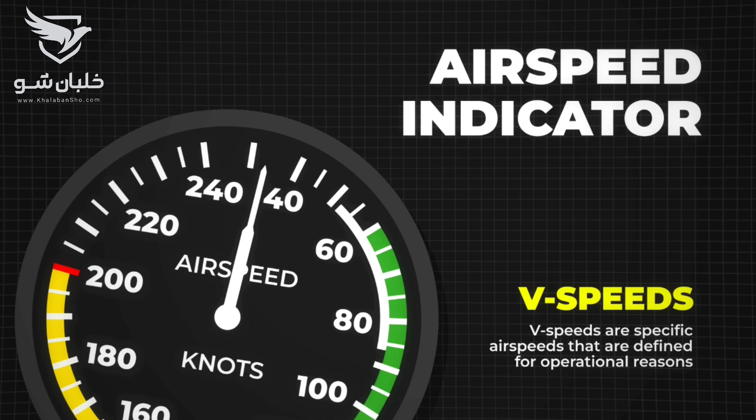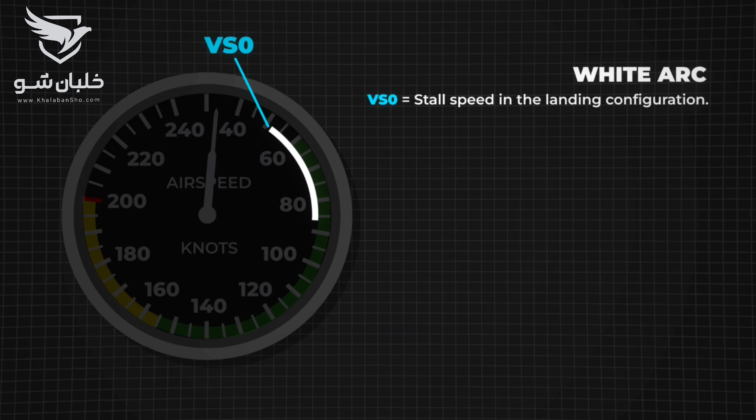The airspeed indicator has different colored arcs. The white arc represents the flap operating range. At the bottom of this arc is VS0, the stall speed with flaps fully extended. If you go below this, the aircraft will stall because it's not generating enough lift. At the top of the white arc is VFE, the maximum flap extension speed. Going faster with flaps out could damage them.

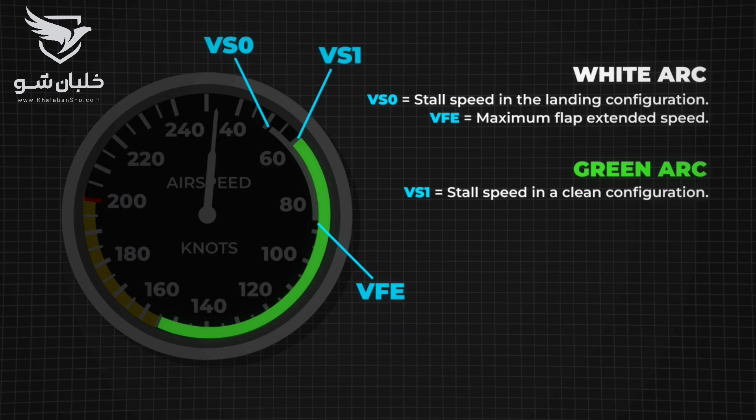The green arc is the normal operating range. At the bottom of this arc is VS1, the stall speed in clean configuration, meaning with flaps retracted. If you fly slower than this, the aircraft will stall. At the top of the green arc is VNO, the maximum normal operating speed.

Beyond this, you enter the yellow arc, the caution range. You should only fly in this range in smooth air. The red line at the top marks VNE, the never exceed speed. Going faster than this could cause structural failure.

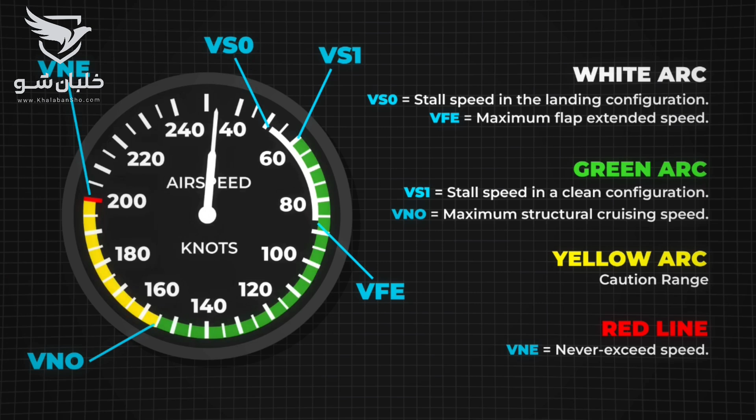Now let's move on to takeoff speeds. V1 is the takeoff decision speed. Before this speed, the pilot can abort the takeoff. After passing V1, the aircraft must take off, even if there's an issue.

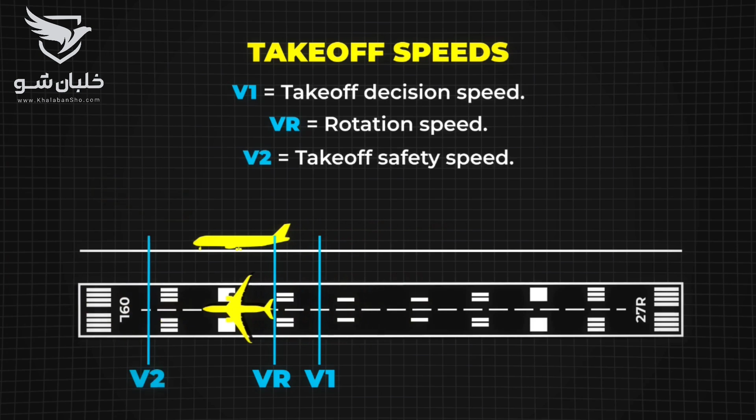VR is the rotation speed, the point where the pilot lifts the nose for takeoff. Below this, there's not enough lift to fly. V2 is the takeoff safety speed, ensuring a safe climb if one engine fails in a multi-engine aircraft.

After takeoff, climb speeds become important. They determine how efficiently an aircraft gains altitude after takeoff. VX is the best angle of climb. This means it allows the aircraft to gain the most altitude over the shortest horizontal distance. If there's a tree, a building, or terrain right after takeoff, you need to climb as steeply as possible to clear it. That's when you use VX.

Since the nose is higher, the aircraft climbs more slowly, and airflow over the engine is reduced, which can cause overheating in some aircraft. VY is the best rate of climb. It allows the aircraft to gain the most altitude over the shortest amount of time. If there are no obstacles, VY is the best choice because it gets you to a safe altitude faster. The climb angle is shallower than VX, but the aircraft is climbing at a greater vertical speed.

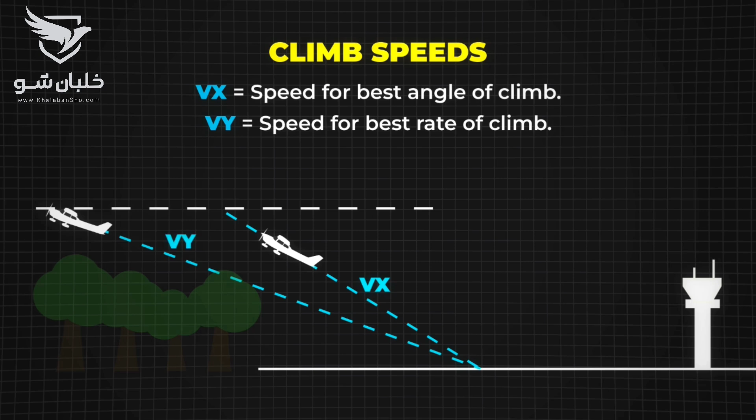Here are some additional V-speeds that are important for flight operations. Let's go through them one by one. VA is the maximum speed at which full and abrupt control deflection can be applied without exceeding the aircraft's structural limits. It is also recommended for turbulent conditions to prevent excessive stress on the airframe. This speed decreases as the aircraft's weight decreases.

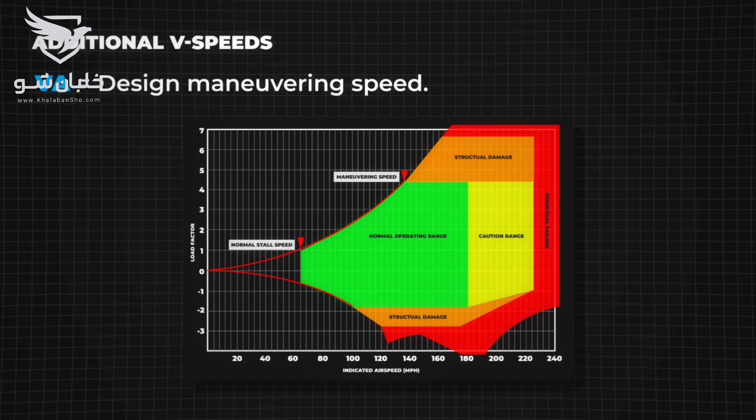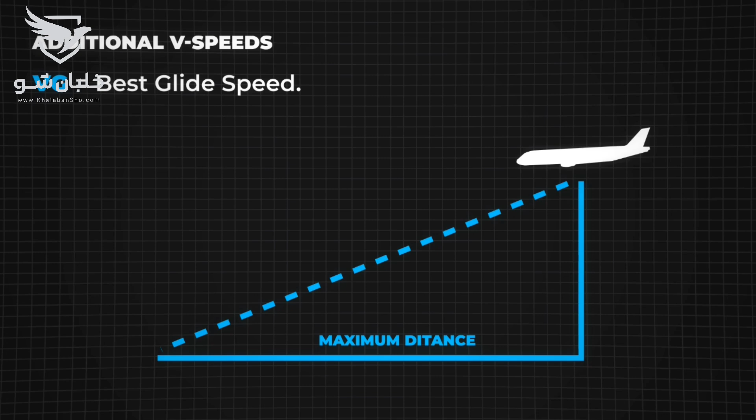VG is the speed that provides the maximum glide distance for a given altitude in case of an engine failure. Flying at this speed allows the aircraft to stay in the air for as long as possible while covering the greatest horizontal distance.

VFR is the minimum speed at which flaps should be retracted after takeoff to avoid excessive drag and ensure stable climb performance. It is higher than V2 to maintain a sufficient safety margin.

VLE is the highest speed at which an aircraft can fly with the landing gear extended without risking structural damage. VLO is the highest speed at which the landing gear can be safely extended or retracted. It is usually lower than VLE to prevent excessive aerodynamic forces on the gear system.

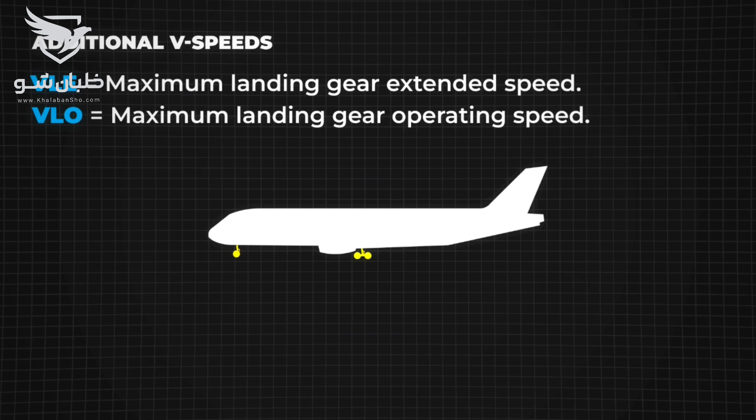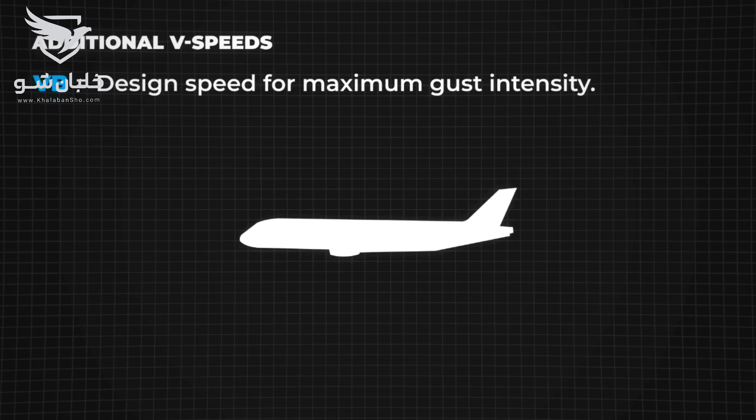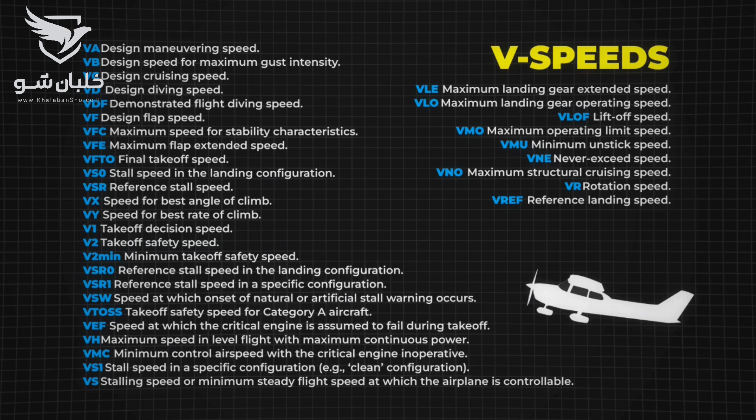These are just some of the many V-speeds used in aviation. Each aircraft type has its own specific values for these speeds, which are determined by the manufacturer and listed in the aircraft's flight manual. Knowing and understanding V-speeds is essential for safe and efficient flight operations. If you want to learn more about aviation concepts, stay tuned for more content.